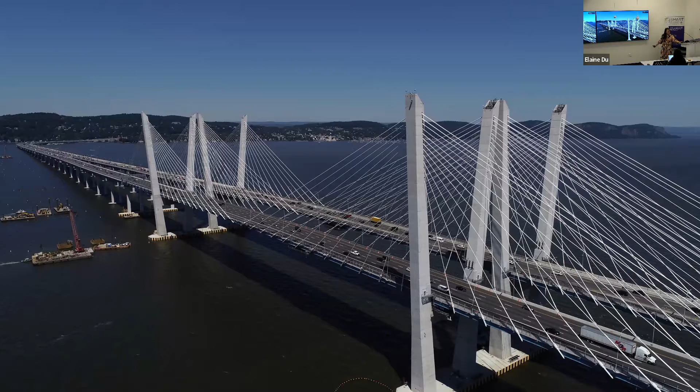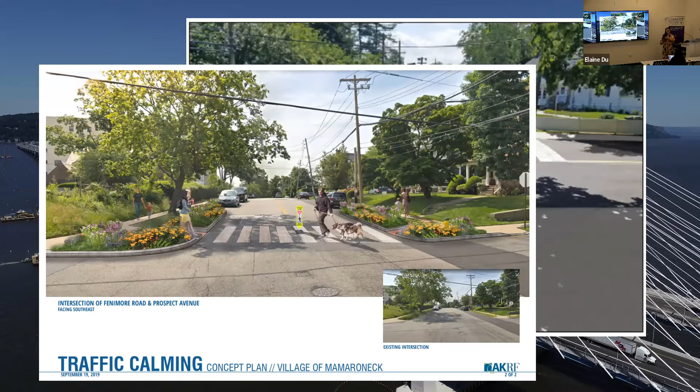So for me, I moved from working on huge projects like the Tappan Zee Bridge to now doing complete streets. This is Quaker Ridge Road in New Rochelle. This is Fenimore and Prospect in Mamaroneck. These are all small villages, towns, cities in Westchester County. This is a development application in the village of Port Chester.

These are all little projects I've worked on in the last year, and it's interesting to see my career move from these huge mega projects down to something smaller. Even though to some, mega projects might be fun and interesting, these small projects have really invigorated me and pushed me in my career.

So, complete streets—I think I've shown you a couple already, but I want to go through why we want complete streets. First of all, safety. Complete streets are great for roadway safety; they improve pedestrian, bicycle, and even vehicle safety.

It helps people be able to go wherever they want to go. It gives people a choice of where they want to be, as well as a way to get there. So it helps with connectivity and connecting communities.

Equity is huge here too, because when you have mode choice, you're able to choose where you want to be and choose your own mode of transportation, and it gets people on an even playing field. You don't need to have a car, you don't need to be of a certain socioeconomic standing to be able to get to school or work or wherever it is.

And finally, climate. Complete streets encourage active transportation and alternative modes that are not necessarily carbon-based and won't emit carbon into the atmosphere. You won't need to take a car—you could just drive, you don't have to drive, you could just walk.

So it's a huge game changer for the climate and reducing our emissions overall.

A lot of communities have thought about complete streets, and this is not a new idea. Complete streets have been around for decades, and transportation engineers have worked on them for decades. New York City has its third iteration of the street design manual, which lays out various design alternatives and complete street improvement measures. Some of them you won't see in New York City, like chicanes or woonerfs, which are rare here, but something to aspire to for New York City DOT.

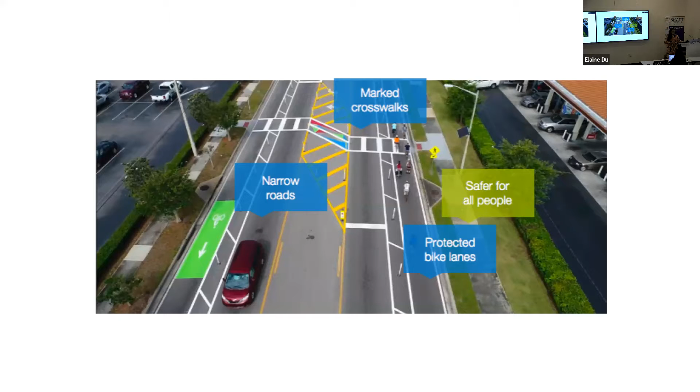This is Hartsdale Avenue, one of my bigger projects. I've been working on it since about 2019, so 4 years. This is within the town of Greenburgh in Westchester County, an interesting road.

This road is a major arterial in a residential neighborhood, with high speeds, a lot of trucks, and a lot of commuters. It brings you from a main gateway of this community down to a commuter rail station, so you can go from a commercial shopping center, travel down this road southbound, and hit a commuter station.

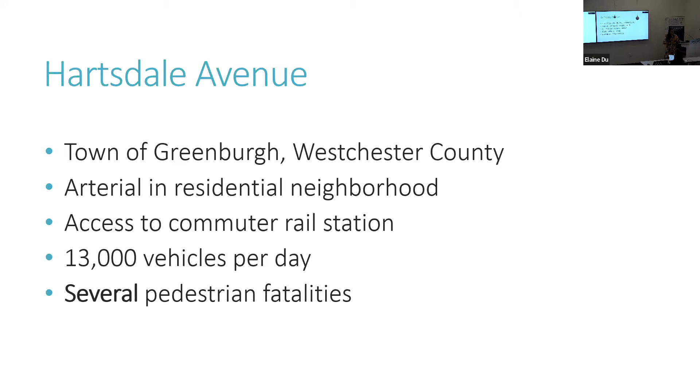We did something about it. The town of Greenburgh hired us in 2019 to do a huge study of this corridor, of this gateway to the community, and we came up with various pedestrian and traffic improvements.

This was January 2021, we were in the field with our client to survey conditions. As you can see, this is another example of a roadway with long crosswalks, very car-centric. We're doing something about it.

In 2022, we had an updated study and gave them the results. We walked the town through our results step by step, and showed them exactly what could be possible. This study was about improving roadway safety, improving access to transportation, giving people that mode choice so they can walk to the train station instead of drive, because they felt so unsafe walking there.

Through this, we applied for a TAP grant with the town, and we won $5 million for the town to actually put these improvements into place. I want to highlight that because of the work we did developing these improvements for them, we were able to assist them on their grant application.

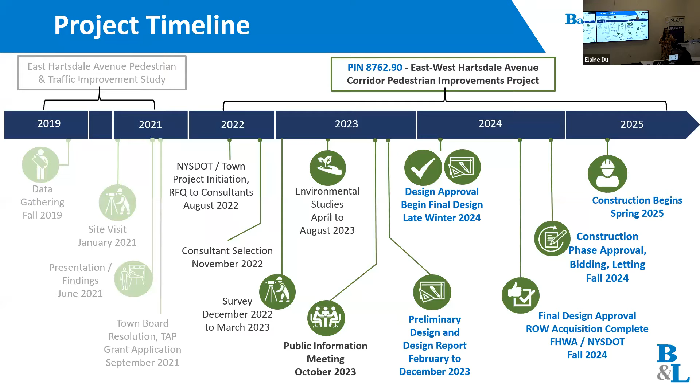So from there, we'll move on. We're finishing up the design right now, and hopefully in spring 2025 we'll be able to start construction. And hopefully soon, residents will be able to feel safe while walking down this corridor.

So this is one of the technologies, the big technology I mentioned earlier. One of the biggest improvements, and really what enabled us to implement these pedestrian improvements on the corridor, is that we're adding adaptive traffic control, which is really exciting.

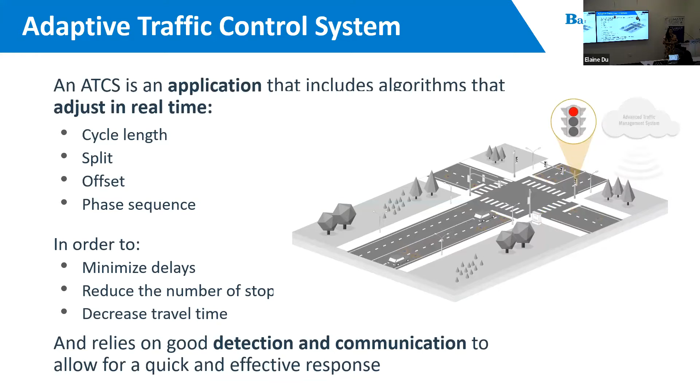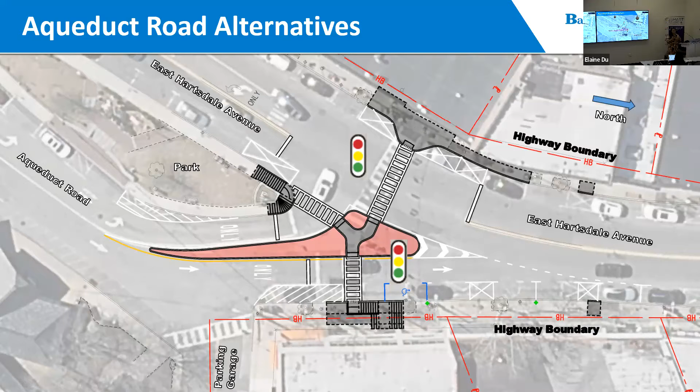It gives pedestrians more space to wait so that they're not standing on the pavement like you kind of see in New York City all the time. And over here we have a curb extension, so again, this is about 8 feet. So we're overall reducing pedestrian crossing at this leg by approximately 20 feet. Overall, 20 feet, you increase visibility of pedestrians, you reduce the crossing time, and it does wonders for safety. It's a small improvement, but it really changes things.

This is another intersection we're working on, one of several on the corridor today. This was where the fatal crash happened. The person was sitting on a bench approximately here. You can see what happened was the driver was driving this way and hopped on the curb. So our idea is to add bollards around this island we're extending, to prevent something like that from happening.

As you can see, these are our designs. We're extending the pavement over here to shorten the pedestrian crossing, and here too. Whereas this was probably about a 60, 70-foot crossing, it's now about 30 feet. So it's really going to change your crossing time.

One other big change is we're converting this road to one-way. Right now this is a two-way street, Rockledge Road. We're converting it to one-way because right now cars can make this movement or this, and this movement alone is a tight turn.

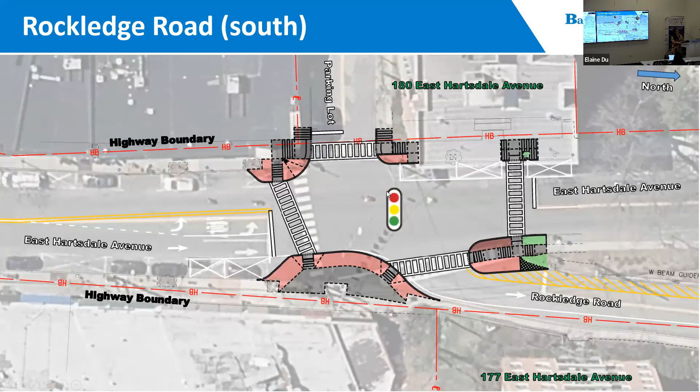Vehicles have gotten hit here because cars have had to take wider turns. So changing this to one-way is going to do a lot for safety and also for the traffic signals, because you're removing one entire phase from the signal. This is one of the more drastic changes we made, including the one-way conversion.

With this one-way conversion, we're converting this section of the road to one-way. The rest of the section over here is currently one-way in the same direction. So we're not having a huge impact on travel time for many, only folks who live about here who were once able to turn out this way. However, if they wanted to, they could cut through this way, or go all around.

But this ties into the next improvement. No, it does not—I did not have a photo of that improvement, I apologize.

This is Rockledge Road, where we are adding the new traffic signal. So we're taking people away from exiting from this intersection, and moving them up here. Because we're doing that, people will have an easier time exiting this road as well. That's better for drivers, better for driver frustration, and also better for pedestrians because it allows us to reclaim a lot of that space that was once for cars.

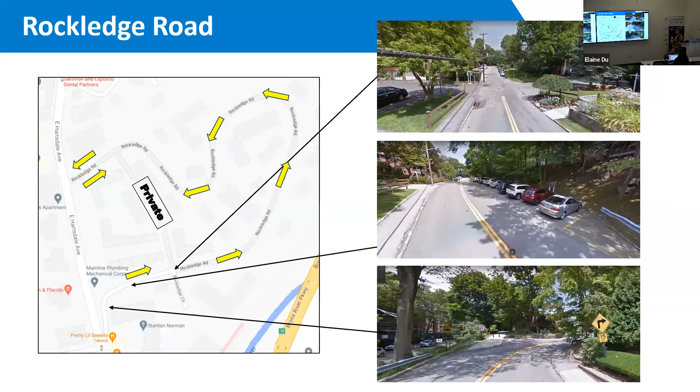Columbia Avenue was another one, and this was where a pedestrian was hit about 4 years ago. We're adding an island here because right now a lot of people turn left from East Hartsdale Avenue over here, into incoming traffic. There have also been head-on collisions here because of aggressive driving, people trying to beat the light. So we're adding an island to force drivers to slow down and make that left turn properly.

Again, curb extensions and bump outs. I already talked about how this improves visibility, but the biggest improvement is that by adding this island, you're not only slowing down vehicles, but giving pedestrians a space to queue in the middle. Whereas this was about a 70 or 80 foot crossing, we're breaking it up and shortening it, reducing pedestrians' vulnerability and their exposure to vehicles.

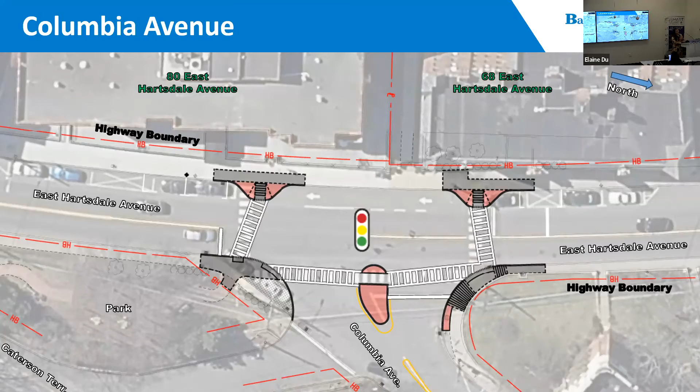Yeah, question—do you have metrics on expected crash reductions from some of these factors?

Through the New York State DOT design process, we don't have to look at those metrics. As a result, we did not do it, because no one had asked us to. But if you want those metrics, I can refer you to the New York State DOT accident reduction factors—they still call it accidents because they're old school. New York State DOT maintains an entire record of accident reduction factors specific to the state. Are you aware of the rest of the resources for this? There's also a federal crash clearinghouse we've used, but there are so many resources out there. I'm glad you brought that up—do you have any other suggestions for resources on crash reduction?

I was just wondering, I get what's happening—I was wondering if you had the actual quantifiable expected reduction. Yeah, we didn't do that, unfortunately.

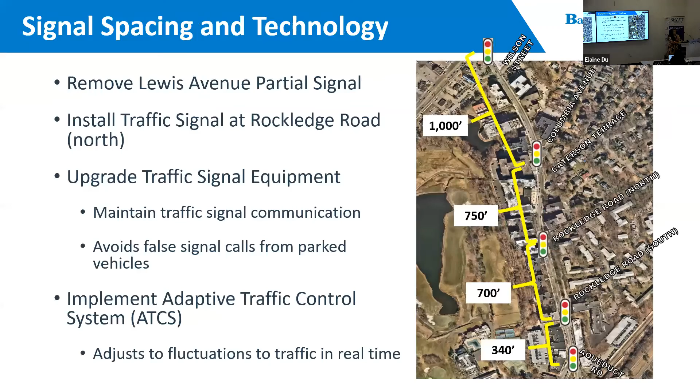What I can tell you though is, for the intersection here in the background photo, in terms of crashes, we did calculate crash rates for all sorts of crashes at this intersection. It is 10 times above the statewide average for crashes for an intersection of this type.

It is 15 times above statewide average for left turn crashes. So this was big. It's interesting that you brought that up, because DOT took a look at our report and said, hey, I have an idea—we'll just do split phasing. That means they would do the eastbound and westbound approach separately, so northbound and southbound go concurrently, then eastbound, then westbound. So what is currently a 210-second cycle, approximately 3 minutes, would go to like 260.

Yeah, it's horrible for delay at an intersection, especially one this busy. It would allow the queues to build up, and the queues currently are about a quarter mile in each direction, so it would really get bad.

We actually talked New York State DOT down from doing that split phasing. We explained that the left turn crashes are not an issue for the east and west approaches—it's the north and south approaches. And those are on a major state arterial, so they don't want to split phase that. Understandably, they don't want to do that. So they're going to do signal improvements and we're going to do adaptive traffic control, but they're not going to do split phasing anymore, which was a win for us and the town.

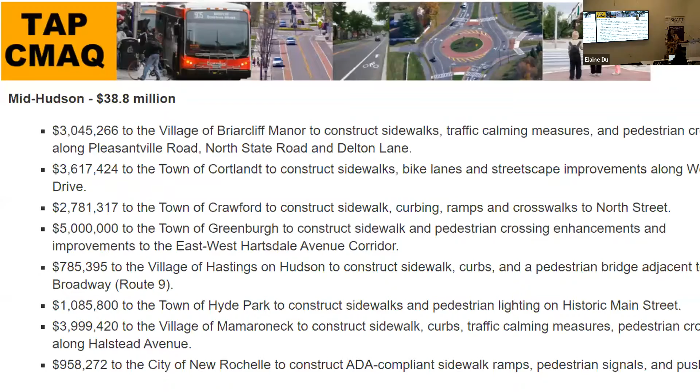Great, so one of the other improvements we're doing is building a sidewalk. So right now—actually, let me go into the map. I'm bringing up this browser because it's the default one, I'm not used to this keyboard, I apologize.

Okay, so this is Hartsdale. For reference, we are approximately here in Brooklyn. This community is up near White Plains, where I live. This is the corridor, East Hartsdale Avenue. This was the intersection I talked about a second ago with the really high crash rates—it's called Four Corners, also known as the intersection of Hartsdale Avenue and Central Avenue in the town.

Right now there is no sidewalk here. This entire corridor, known as West Hartsdale Avenue, has no sidewalk. There are people walking to and from here. There are approximately 3 schools, including 2 private schools and 1 large public school, plus another—so 4 schools, including the middle and high school. Students are actually walking down this corridor to get to East Hartsdale Avenue, to the restaurants and Starbucks and everything, and it's really dangerous.

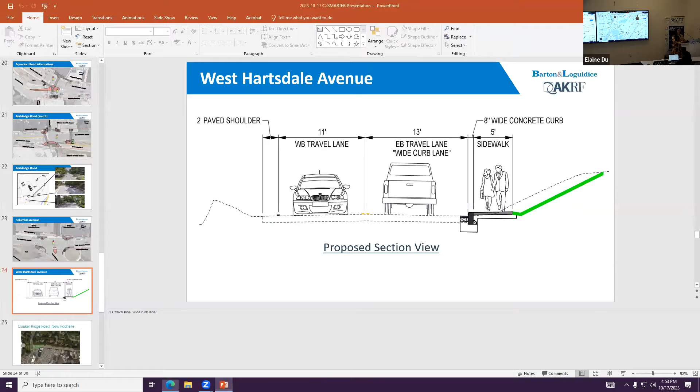And it's really, really crucial because, again, it's all about giving people mode choice, giving people the ability to get to where they want to be. So yeah, we're adding the sidewalk, and it's very exciting.

Beyond that, Hartsdale has been my passion project for these last 4 years, but I've also worked on a bunch of other complete streets projects. This is Quaker Ridge Road in New Rochelle.

Through this, we're also adding sidewalks and bike lanes. This corridor is crucial for the city of New Rochelle because there are various houses of worship on the corridor, including synagogues, where if you can't drive on a Friday night, you have to walk. So it's going to really allow people to walk safely at night.

If you see here, we're adding sidewalks, we're adding bike lanes. It's just really awesome to be able to do this.

This is VisSim, a microsimulation program. We did a very rough model, more for presentation purposes. Has anyone used VisSim before? No one? Okay, you have to. VisSim is a tough program, it takes hours to code. It's pretty intensive. This was a really basic one that we punched out in maybe 10 or 15 hours.

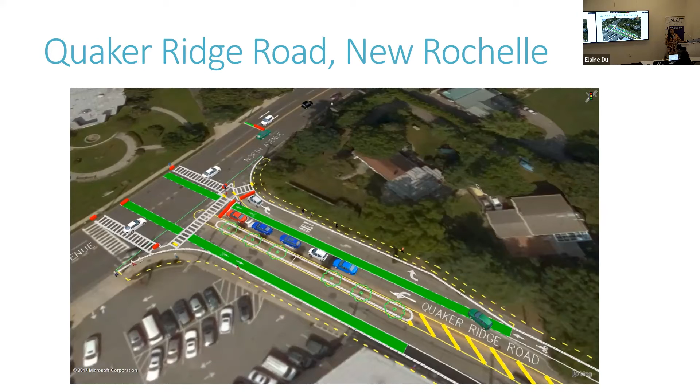Again for New Rochelle, we've done a full Complete Streets plan citywide, and out of that, Quaker Ridge Road was one of the main projects that came out of it, but so was Stratton Road. Stratton Road was a little smaller. There wasn't a whole lot we could do there because it's currently a 2-lane road.

It just does not have sidewalks or bike lanes. So the idea is to add sharrows, add new sidewalks, but also acquire land for those sidewalks because there isn't enough roadway space.

This one is interesting, and actually the city ended up not going forward with it, unfortunately, but it is out there. The neighbors have been advocating for it, and we've heard a lot of good feedback about this design as well. But again, it reinforces the idea that if you want the ability to walk somewhere, you should have the infrastructure to help you.

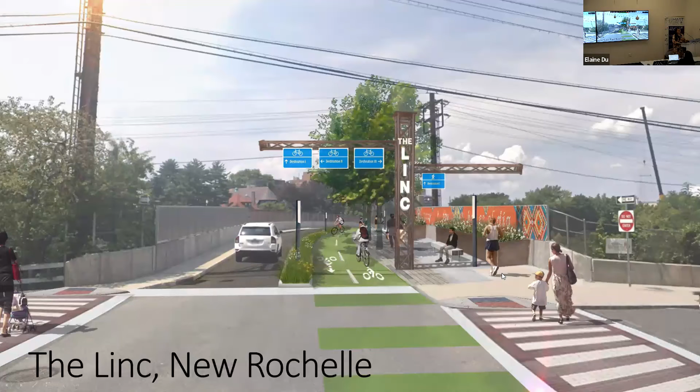So it's going to be a linear park, and the mayor of New Rochelle has compared it to the High Line. You can see there will be a lot of pedestrian amenities, there will be protected bike lanes, but again, it gives people that mode choice to be able to walk.

This is critical because it connects these disadvantaged neighborhoods to the train station. Whereas they used to be walking down Memorial Highway in the past, where there were no sidewalks and they were getting hit by cars, it was really bad. They can now walk down this beautiful park and get to the train, get to where they need to be.

This is not a complete street by name. It is more of a park, according to the city, but it incorporates so many complete street elements, and it's really reclaiming so much of that roadway space just for pedestrians and bicycles.

So you can see the full plan here. Unfortunately, during the negotiations with New York State DOT, they had to add back in some travel lanes. So vehicles will still be able to go down this way to North Avenue. There will also be one lane of traffic maintained on this side, but the rest of it you can see is just a gorgeous park with bike lanes all throughout.

This was way over designed back in the day, and you're converting it all into park space. Levels of service are going to be hurt a little, as they are by most complete streets projects, so your delays will increase.

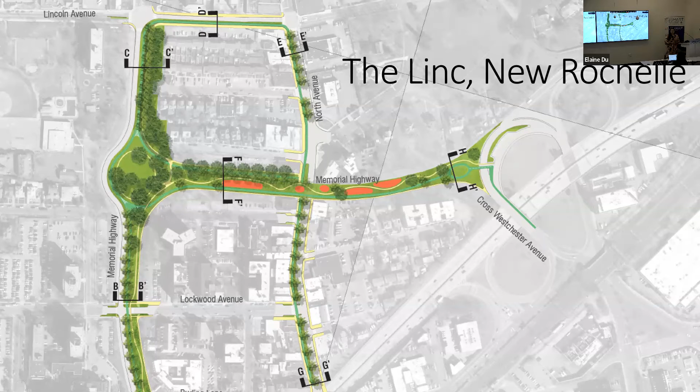So we do expect to see that mode shift that is really going to normalize some of the traffic here. I wanted to take it back to why complete streets. Again, safety. We talked about some of the safety aspects, crash modification factors. You're reducing potentially the number of crashes on these roadways, you're improving pedestrian safety, you're making it safe for pedestrians and bikes to be on this road and get to where they need to be.

You're also giving people a choice of where they need to be, which is key to connectivity. You're connecting communities, reconnecting communities with major centers, major points of interest, and also transit centers.

This is really an equity method. It is a way to create equity for all groups to be able to choose their mode of transportation and to be able to get to where they need to get to, to work or school, most importantly. And again, reducing carbon emissions, giving people that mode choice, and hopefully shifting them from carbon-based modes of transportation to walking, biking, something more active, something that does not release emissions.

So complete streets are so important. There are so many different ways to implement them. There are a lot of ways to incorporate technology like adaptive traffic signal control, and a lot of ways for communities to apply for grant funding for these.

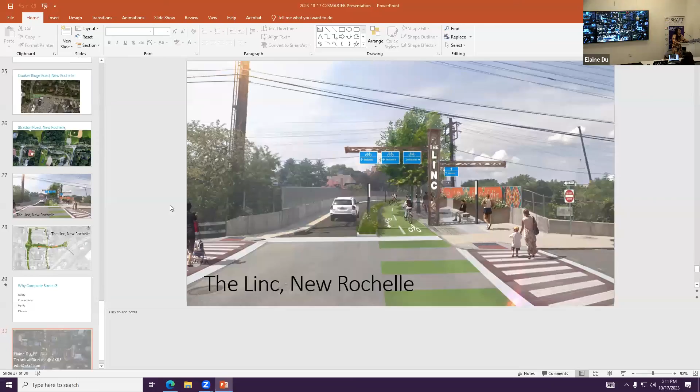I'll go back to the East Hartsdale corridor. First of all, for the Linc, because we are maintaining a lane of traffic, we're able to accommodate emergency vehicles still. And the various emergency responders understand this project and are in support of it.

This is the study corridor again, East Hartsdale Avenue and West Hartsdale. There's a fire station right here, and another fire station approximately here. So there are two fire stations along the corridor. We have kept them in the loop every step of the way to make sure they understand our design and agree with it.

Another upgrade we have on the signals is preemption, which police, EMS, and fire have talked to us about. They want preemption on each signal. I'll explain: when a traffic signal senses there's an emergency vehicle at the intersection, it gives them priority and changes the signal to accommodate them first over other traffic. So preemption will be all up and down this corridor, which will be very good.